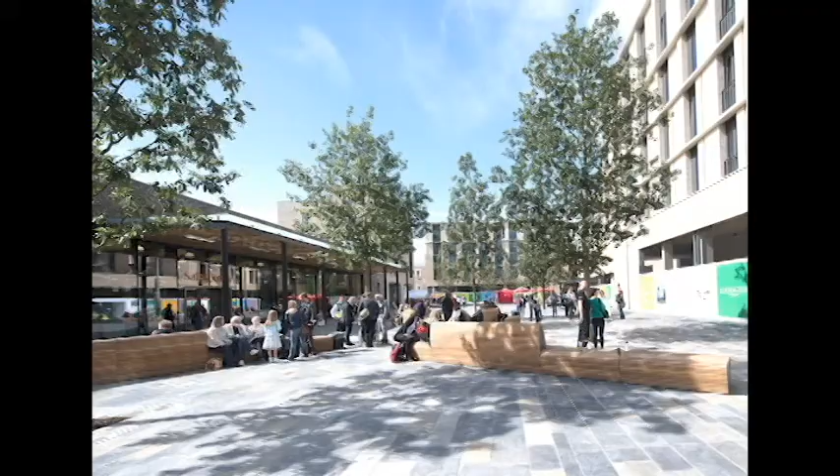Since 2013, the Northwest Cambridge development have been building phase one of the development, the area known as Eddington. Eddington opened in 2017 and is the heart of the new residential community. Unprecedented in scale and ambition, Eddington is a new place complete with award-winning community facilities which are open to the wider community to enjoy. Phase 2 will build on this legacy, focusing on providing more essential housing in the area.

The development is ultimately set to have 1,500 homes for university and college staff, 1,500 private houses for sale, and accommodation for up to 2,000 postgraduates.

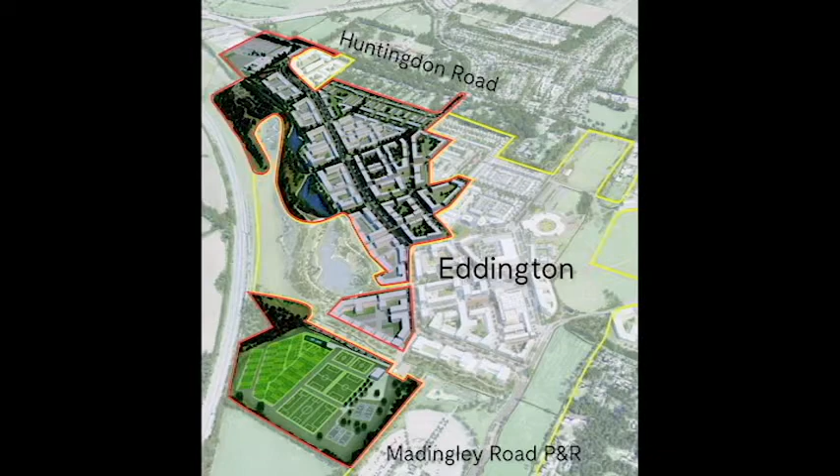Discussions for Phase 2 are now underway with the university planning infrastructure for Phase 2. Phase 2 is in South Cambridgeshire, to the west and north of Eddington, reaching further up Huntingdon Road and down to the land behind the Madingley Road Park and Ride.

The Phase 2 infrastructure does not contain any plans for the housing in Phase 2. It looks at the new road junctions on Huntingdon Road and within the development, extending the parkland already at Eddington and creating communal outdoor facilities such as sports areas and play areas.

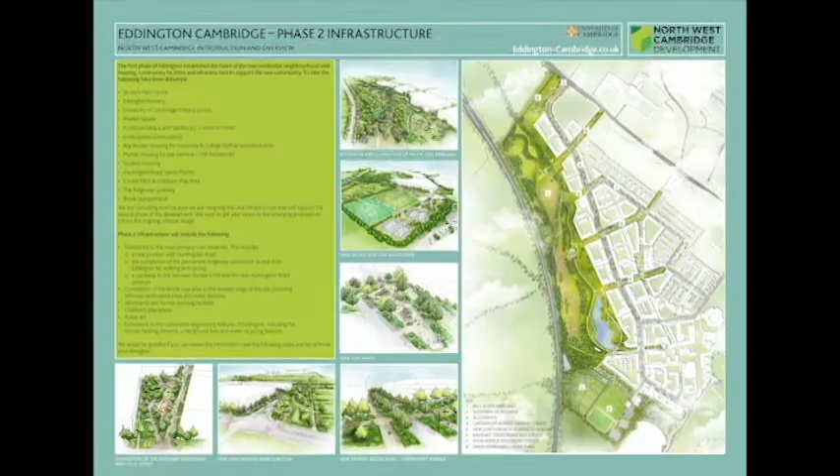We are undertaking this consultation to share with you the plans for Phase 2 infrastructure and to take any comments you may have on board. You can find full details on how to submit comments to us on the boards and information below.

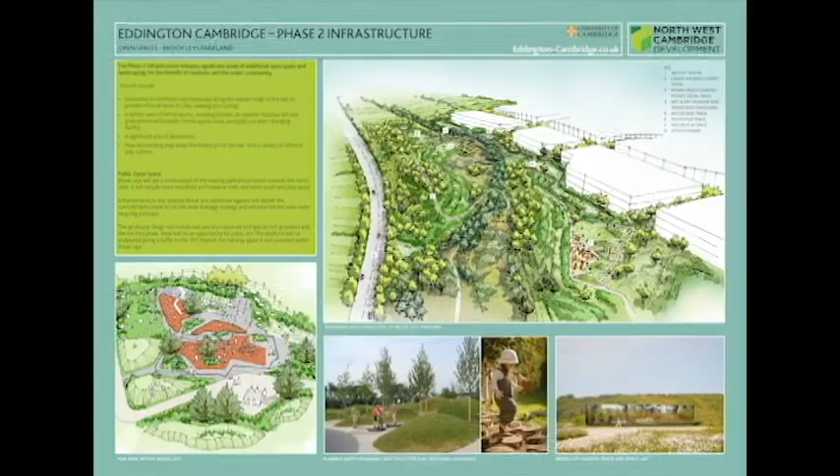Turning firstly to the open spaces and to Brook Leys Parkland, this is a significant piece of new open space designed for both new residents and for the existing community, designed in a way that extends the naturalistic and ecological approach delivered as part of Phase 1. It will include areas for play, walking and cycling, significant amounts of new ecological planting from wetlands to meadow to woodlands. We'll see a mixture of different ecological habitats, wet and dry meadows, species-rich grasslands.

We've been working very closely with the university's ecologists to design those habitats to target particular species. You'll see enhancements to the Washpit Brook, which is retained, along with the existing vegetation along it, as well as a number of new lagoons which sit between the built form and the earth mounding up against the motorway.

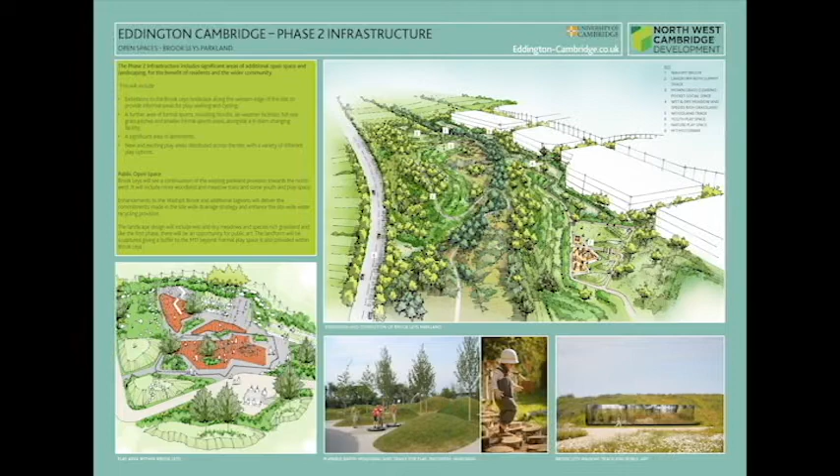It also incorporates a piece of public art, and the landform is very much a sculpted landform rising up to the west to provide that buffer against the road. We think this will be a really lovely new resource for residents and for the community, something for everybody to enjoy.

Turning next to the green corridors. In Phase 1, the first green corridor was delivered. Phase 2 delivers 5 new green corridors, and these connect the Brook Leys Parkland with green fingers back into the built-up areas. They incorporate a number of sustainable drainage features, swales and rain gardens.

But also they really are a linear park that can be used for people to relax and sit and enjoy, for cycling and walking. The images on the board here show a view up one of the green corridors looking from Cartwright Avenue, the new primary road through the development, up towards the Ridgeway, showing the network of paths.

The paths would be going through the green corridors, the connection down to Brook Leys and the rain garden running through there, and the approach at Cartwright Avenue where pedestrians will have a traffic-calmed raised table to cross over the primary road down to the western edge.

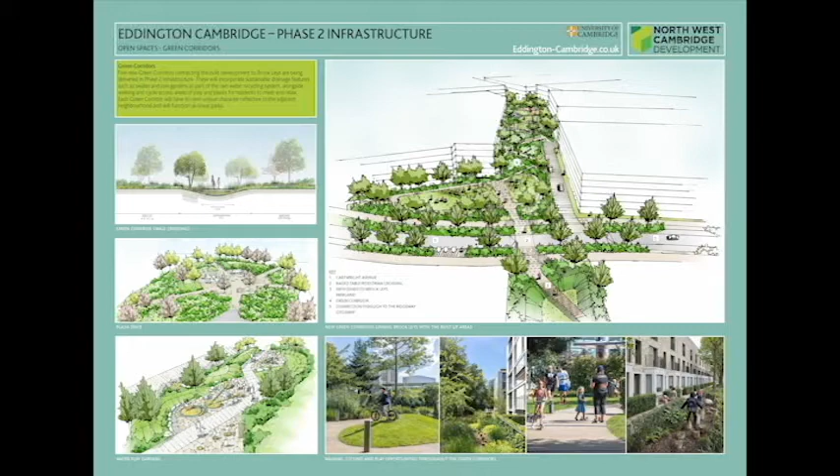Moving on then to the sports pitches and allotment area, which are clustered together in the south of the site. They will be delivering 2.6 hectares of allotments, around 100 plots depending on how you mark it out. There'll be a number of raised beds near the entrance for those people that are less able or find a level plot hard to deal with.

They will also have ancillary features such as watering troughs so you can water your plants, tracks so you can access, and there'll be a toilet available for allotment users in the sports building.

Then turning to the sports cluster, the image shows you the overview of the arrangement here. A key component of this is going to be the delivery of a 3G pitch, an all-weather pitch that will be lit and bookable for everybody to book and use. There will also be a full-size grass pitch and 2 five-a-side pitches to the north of that.

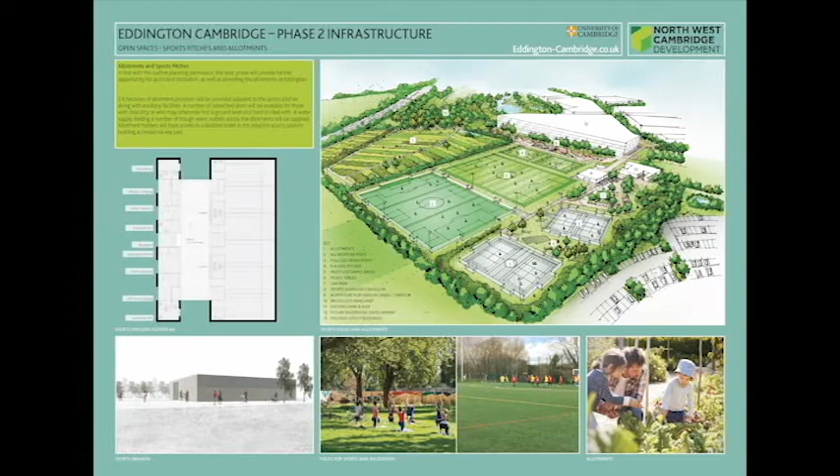There will be 4 multi-use games areas paired together, primarily for ball sports such as netball or tennis, and a small parking area. The plan also shows the sports changing facilities, designed by the same architect that designed all the other utility buildings through Phase 1, Robin Lee. It's a 6-room changing facility with reception facilities, changing for officials, and an accessible WC.

Moving on to the public realm, the spaces within the built development, we've got a number of different spaces and streets and focal spaces that we will be delivering as part of these works. Starting first of all with the primary street, Cartwright Avenue, this is 1.2 kilometres of new primary street being delivered as part of the development.

It's wider than a traditional street, so that it can incorporate very generous verges with planting of large-scale trees. It incorporates cycleways and footways on both sides, and it will be traffic calmed all the way along, so it's only 20 miles per hour, with level crossings for pedestrians at key junctions with the green corridors.

In addition, there will be a secondary street network, the continuation of Milne Avenue, and also the completion of the permanent ridgeway from Bunkers Hill to Eddington, which will be pedestrian and cycle priority, with a number of new public spaces along the way.

There will also be an extension to the existing cycleway on Huntingdon Road, which will be delivered to link Bunkers Hill with the new junction.

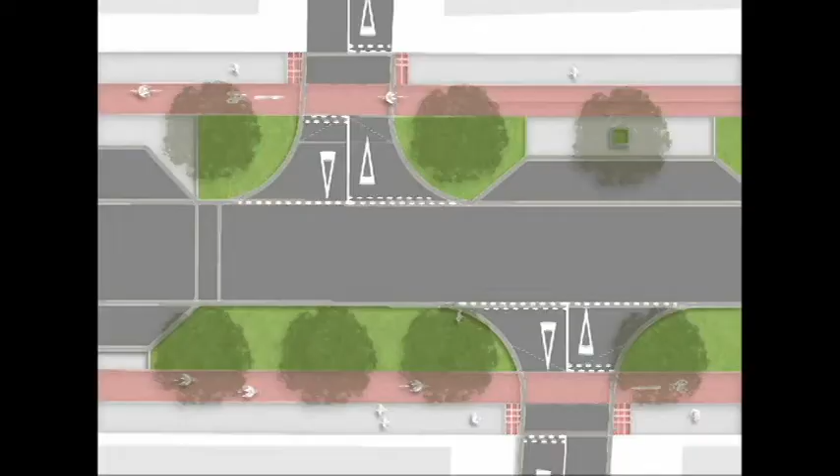We've been doing a lot of lesson learning from phase 1, and one of the things we're very keen to do in phase 2 is to deliver cycle priority across the secondary road junction. There's a view of the new Huntingdon Road junction.

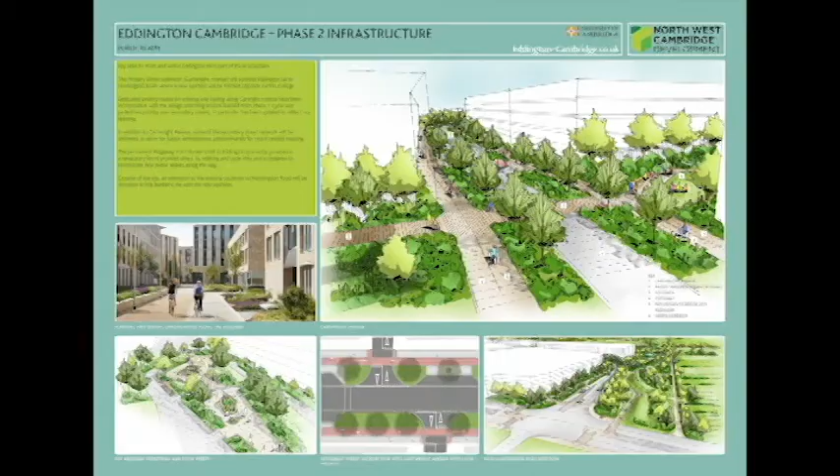The new junction on Huntingdon Road is all designed to adoptable standards. We've done some trial hole investigations on the site to determine where the utilities are. It will have cycle and pedestrian facilities to make sure people can safely use the junction.

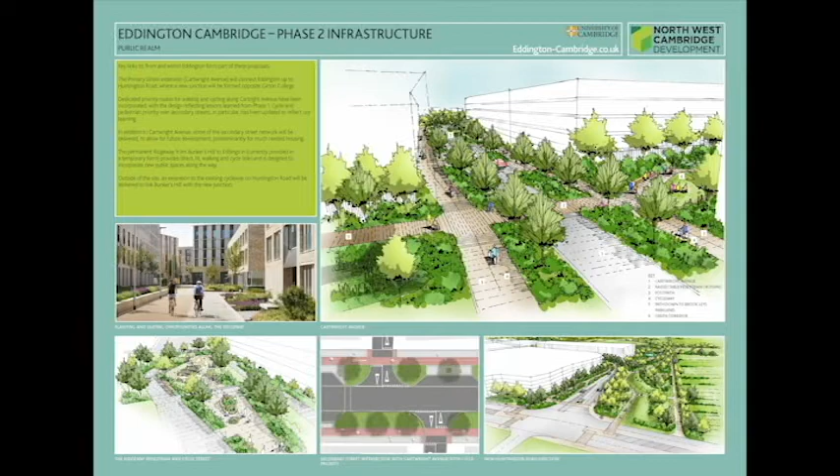There is also the provision of a new cycleway linking this junction on Huntingdon Road down to the new Bunkers Hill access into the phase 1 site.

So turning to sustainability, Eddington is exemplary in its approach to sustainable design, and phase 2 will build on the good work already undertaken in phase 1.

We will be continuing the site-wide district heating network, continuing with the approach for the underground bins and the recycling system as established in phase 1.

The other utilities within the development, such as electricity and district heating, continue on from the networks installed in phase 1. The utilities are all sized and held within utility corridors, which have been designed and placed integrated with the urban realm, and trees, underground bins and other street furniture have been placed such that there's no interference with any of the utilities in the future.

Northwest Cambridge development has one of the most sustainable non-potable water systems in the country, set out for phase 1, and we continued to develop that for phase 2.

The essence of the surface water system is that it captures all the surface water runoff from the hard areas. The water is then channeled through the green fingers and captured on the western edge, where it is held in a series of lagoons linked in a chain.

The water from phase 2 and subsequent developments will go down into the existing lagoon constructed for phase 1, where there is the pumping station.